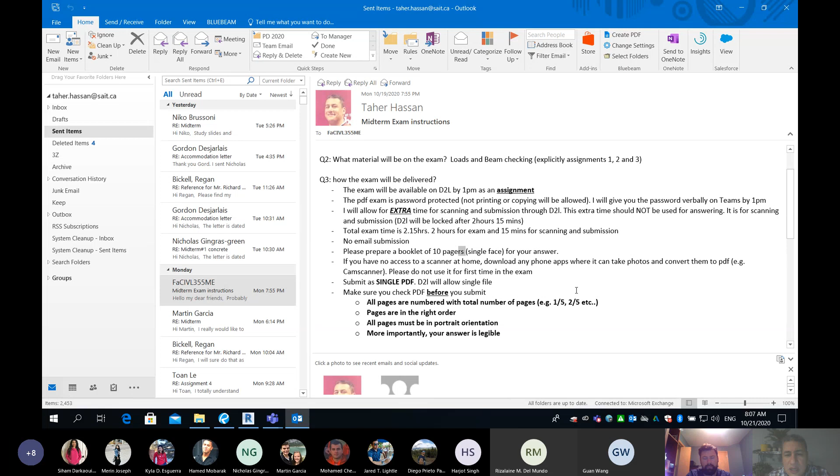Now, please prepare 10 pages — there's a typo here, it says pagers, it's only pages. So prepare 10 pages, single-faced, for your answer, like a booklet where you can answer the questions.

Also, if you have no scanner at home, which I guess not everyone has, all I'm asking is download any app — I'm not selling you an app, any app you like. However, please get comfortable using it. I guess CamScanner or a document scanner app is a good one. Whatever you like, use any scanner, but please do not use it for the first time during the exam — that would be a fatal mistake. Please ensure you understand how to scan it.

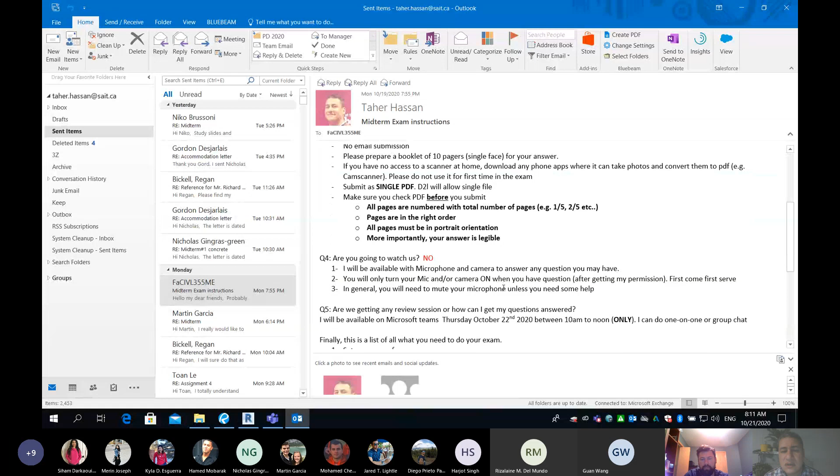I think that's intuitive, but the thing is, when I don't say it, people don't pay attention, and even when I do say it, there will be one or two who don't follow. But then you just have to blame yourselves, not blame me.

Are you going to watch us? The thing is, I'm not going to watch you guys individually. All of us - I need to see 34 students for the entire 2 hours logged into MS Teams. You just log in, turn off your camera and turn off your mic, mute yourself.

You will talk and speak only when you ask a question - you'll have to raise your hand, I'll allow you, and then you unmute yourself and speak. And if it's a common question, everybody will be listening. So I'm not going to watch you.

So you guys are hiding, huh? So don't make use of that.

I said I will be available with microphone and camera to answer questions. You will turn off your camera and mute yourself. You only undo that if you have a question after getting my permission, and first come, first served. Okay, and please mute yourself unless you need some help.

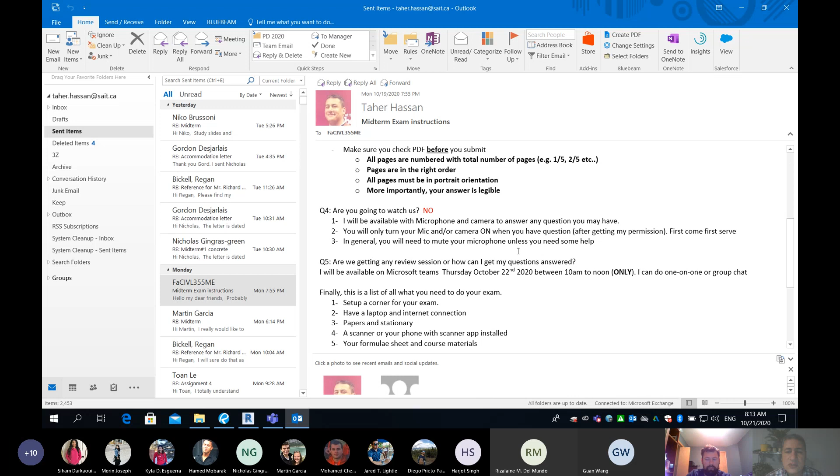Now, question number 5, which is very important, very important. I got this question probably 1 or 2 times. Are we getting a review session? So here is the point. I'm straightforward. If you are a fair person and you study my material and the exam, you will see the exam will be very, very fair. There is no surprise. Anything on the exam, probably you've seen it so many times, if not a single time in my class.

Okay? So I don't want to spend hours reviewing and solving a copy and paste of what I've done, because your lecture notes already have numerical examples. It's not theory. It is mixed between theory, introduction, and also numerical examples. So all I'm asking you is very simple. Maybe watching the video is very time consuming because we've done like, let's say 6 weeks or 5 weeks to the midterm exam. So watching 5 times 3 times 2, this is very time consuming and it's not feasible.

So what is feasible is simply reading the lecture notes. I guess the best way to go right now is printing your lecture notes, or maybe leave them not printed but take notes on them, just like Gord did. You always have some notes on your lecture notes. I think this is the best, and that's what we used to do when we went to class. When we were in the class, there were no videos, there was nothing. It was me writing on the board, and my students copying my board into their own lecture notes.

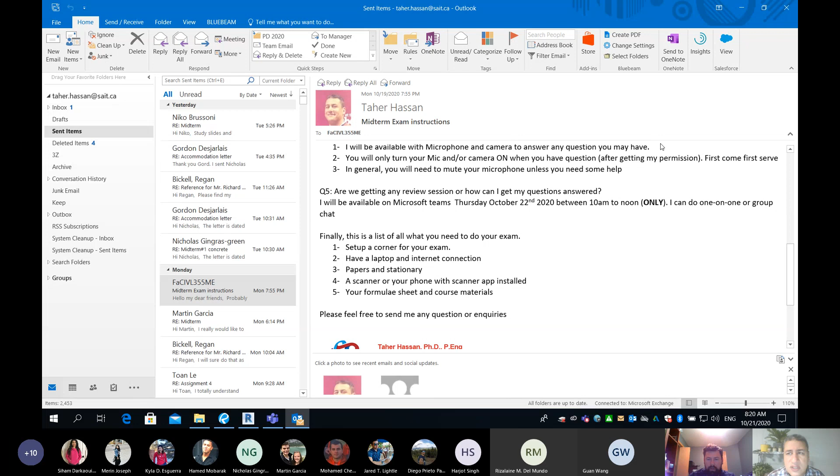Prepare those 10 pages like a booklet of plain paper or engineering paper. I don't care whether it's plain white or engineering. That's your choice. Make sure you have a scanner next to you or your phone with a scanner app installed, and you know how to use it properly. And finally, your formula sheet and course material, whether you like it printed or digital, that's your choice. I have no control over that. Okay, guys? Any questions so far?

Hopefully my email gives you a full picture of what the exam will look like in terms of administration, in terms of content, assignments 1, 2 and 3, there is no surprise. And I say one more thing, and it has to be clear. My exam needs somebody who is smart. When I say smart, I'm not saying genius smart. It means vigilant. When you look at the problem, please don't jump right away and solve it. Give yourself 1 minute, because this single minute can save you a ton of time.

For example, if I gave you a beam section, look at the rebar. Is my rebar symmetric or not symmetric? If it's symmetric, you know where the centroid is. If it's not symmetric, then I know what to do to find the centroid. There was a very common mistake, look at assignment number 3, look at my feedback and markup for you. Some of you used the centroid in the middle, while in the assignment it is not in the middle because it is not symmetric.

And remember, when I say it's not symmetric, I'm referring to the number of bars and bar diameter. To say my rebar is symmetric, they have to agree in number and also in bar diameter. So if you have a change in bar number or bar diameter or both, then it is not symmetric, and you have to find the centroid using what you learned in strength of materials and early on in my class. Please be observant. Think for 1 minute before you answer, because it will save you a whole bunch of time.

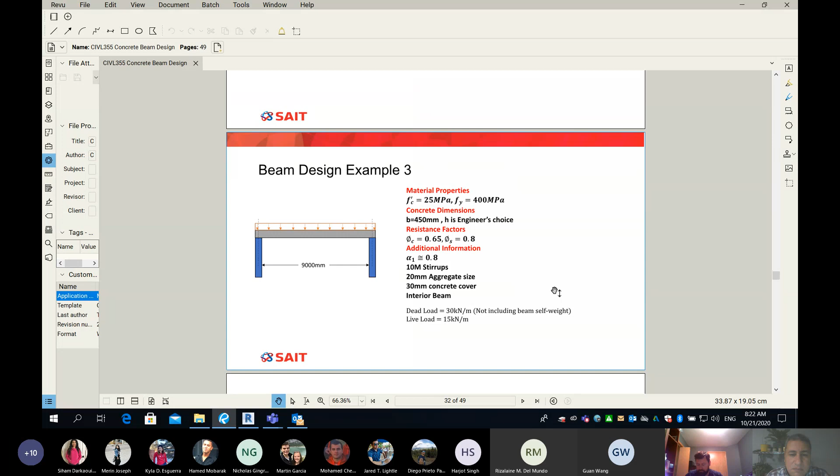Okay, great. So let's move on to our class today. So I have my presentation, which I started the last class, and the example, which was kind of a roller coaster, where we have to iterate and go back and verify this and verify this, so it doesn't work. No, let's change that. And that's a good example to prove that the design process in general is not a linear process. If they do not work, we have to refine them and do some kind of iteration, internal iteration.

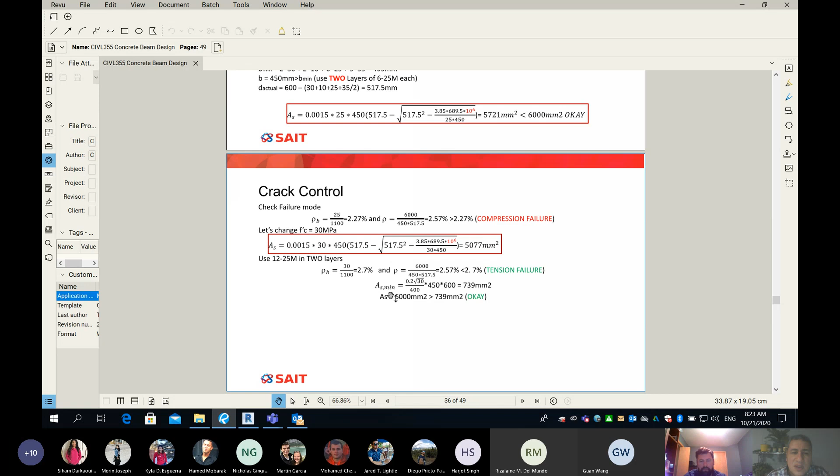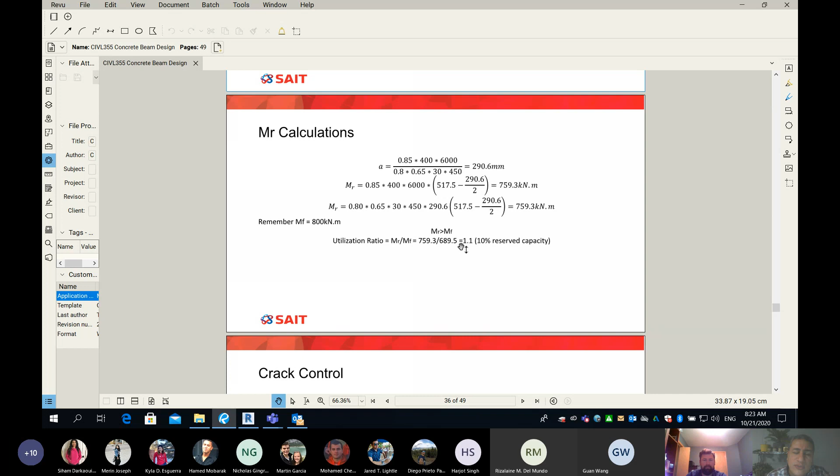Now, guys, where we ended up last class is somewhere here, okay? So this is where we ended. We talked about how to do the beam design and also how to do crack control. But the thing is, there is something I never covered, and that's why could you please download my latest set of presentation like this one right now, because there are a few pages added, and again you will understand why I added those.

Okay, now let me start here. You guys know this number here? What is this number? Can anybody tell me what is this number? I'll zoom in. Look at my screen. The moment force. Excuse me. The moment force. Actually, there's nothing called moment force. It is called factored moment. So this F over there is referring to the factored moment, because you can see we factored our loads. And so we're using here our factored load, and what we get is something called factored moment.

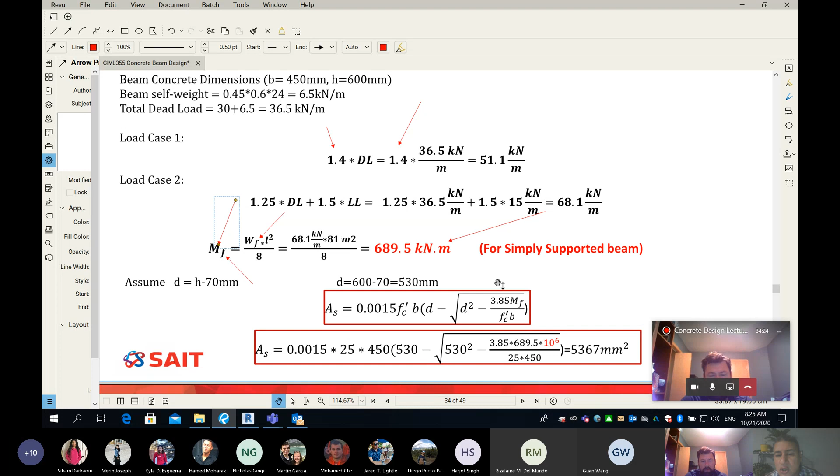Okay? So guys, in plain English, what do you mean by moment? It is the moment that is going to act on my beam under factored load. So what is my job in my design? I need to make sure that my beam is strong enough. When I say strong enough, it means the capacity of the beam will have to be equal or more than this number. That's something we said several times in my class so far. We have to make sure that M sub R, which is the moment of resistance or the capacity of the beam, exceeds or equals my MF. And I always start with MF is equal to MR, if you're following.

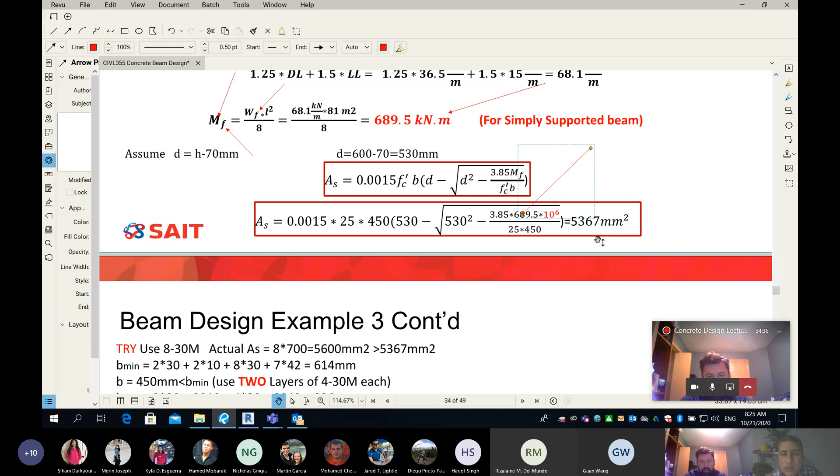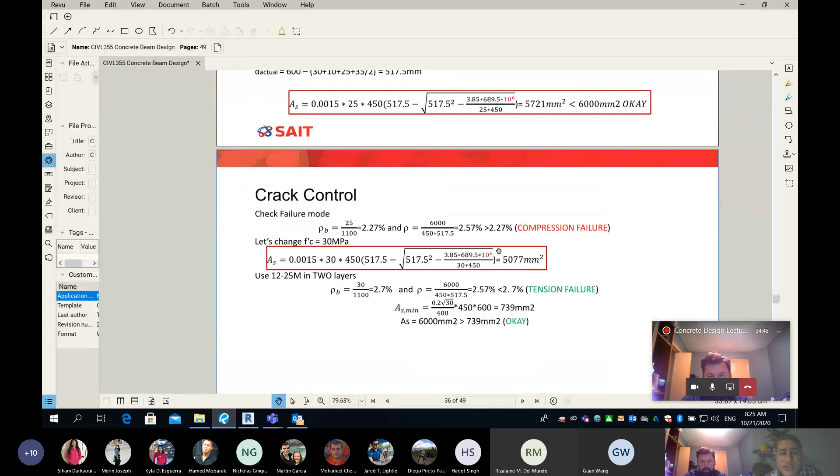And then when I say MF equal to MR, I can use the same number here to find the amount of steel. And that's what I did. The amount of steel was this much, which is 5,367. And then what happens? I went through iterations, not only one, probably there were a few iterations here until I'm able to make sure that my beam is working. At the very end, I used 12 25M, and so those are 6,000 square millimeters of rebar, and the required area of steel is simply 5,077.

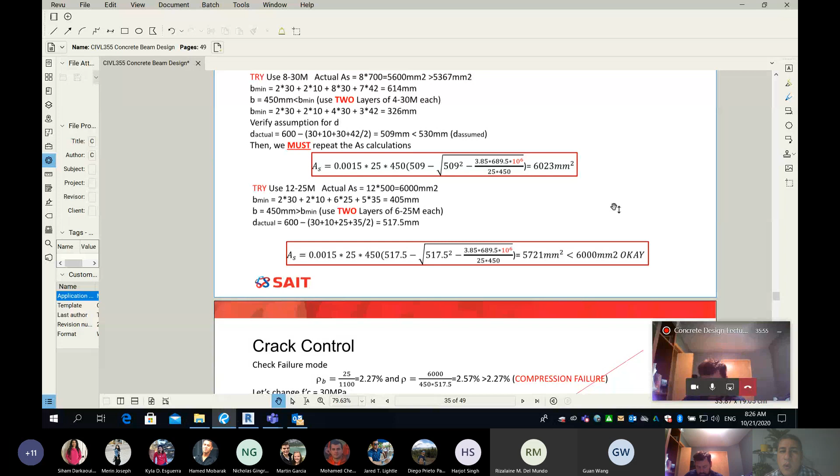So you can see so far we have two moments. One is called M sub F, which is the factored moment that will affect your beam. And the other bending moment is called M sub R, which is moment of resistance, which is the capacity of the beam. Now, guys, remember I said along the way, yes, we start from the equation MF equal to MR. So I will start with making the capacity of the beam the factored moment. However, I will ensure along the way that my moment of resistance or the capacity will never fall below MF. How? One of the things is we need to provide area of steel always more than this number. Always has to be more than this number.

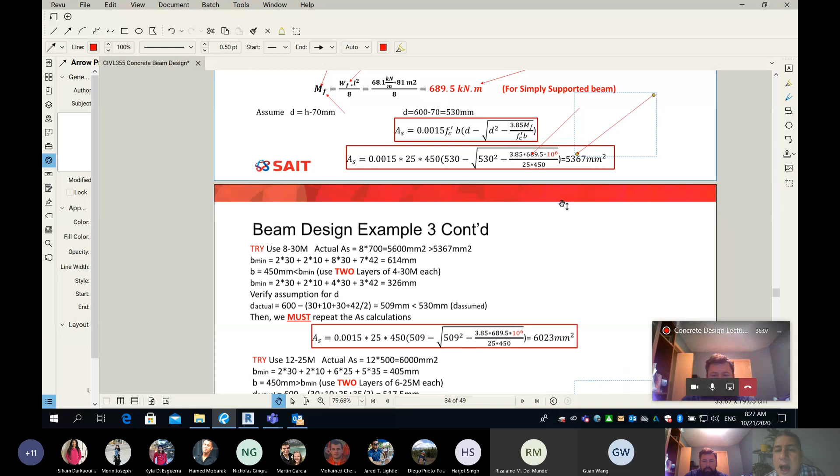Okay? The actual area of steel always has to be more than the area of steel as per the equation. Number two, for the lever arm, I have to make sure that my actual lever arm is more than the assumed lever arm. Those are the two things that will ensure that the moment capacity of your beam will exceed the factored moment, so we are on the safe side. Following so far? Are you following this discussion? I need to hear some noise.

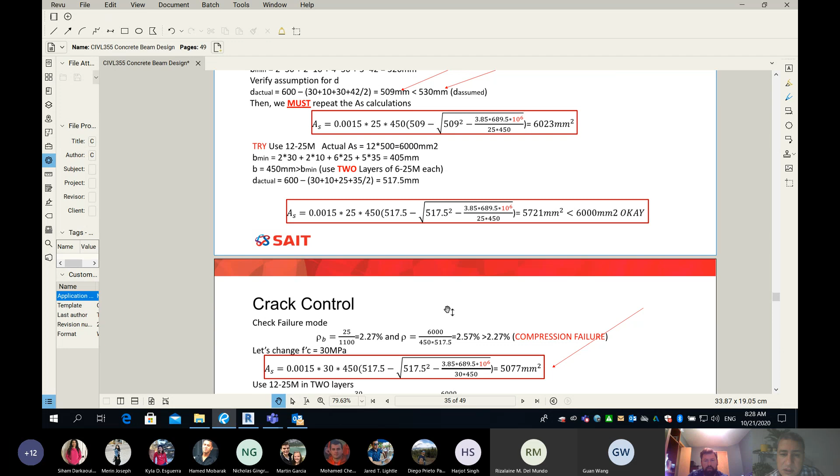Yeah, we're following. You said there were some new slides added. Exactly. So here we go. So you can see I added one slide here. And please, when you look at this slide, there is nothing new. There is nothing new. So we started from a beam that needs to have a resistance. Remember, I'm gonna remind you, what is the number? The number was 689.5. Okay, the beam is supposed to do that. However, as I added steel more than required, and made sure that my lever arm is more than required, what do you think about the MR? Is it going to be exactly this number, or will it be more?

More than MF, my MF. Exactly, guys. So the last slide here, which I added for every example that I have solved so far, and I will show you where. So for this example, I did exactly what you will do tomorrow in the exam. It's a check problem, because my beam is already designed, so I know how many bars, I know the beam section, the shape, the dimensions, everything is known. So I'm going to do beam checking to find what is MR, same as we have done in number 3, which will be examined tomorrow.

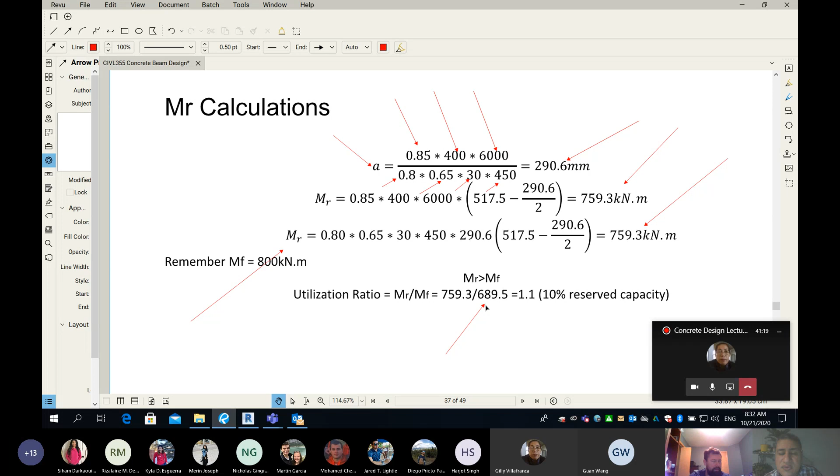Guys, look at this, please. So now my moment of resistance is 759.3. And remember, originally my moment, I'm sorry, I have a mistake here, I will have to change it. So my MF really is 689.5, which I estimated from here. So remember, I need a beam to resist 689.5, but when I finalize my design, my beam is going to resist this much. So the ratio between MR and MF is 759.3 divided by 689.5, which gives 1.1. Let me ask you, what happens if this number is equal to 0.9? What do you think?

That means your MF is higher than your MR. Yeah, what does this imply? What does it mean? Your system cannot resist the load. That means it's unstable. No, sir. No, no, no. You're confused. You said something very nice, and then you followed by something that is not right.

So it means yes, it means it's unsafe. Okay, but the words unstable and unsafe, those are two different names, they're not the same. So your beam is still stable, but it's unsafe. It means if you arrive at this level of load that gives you 689, your beam will fail.

And that's why this ratio is called utilization ratio. And simply, it is the ratio MR divided by MF, or actually, to be honest, this is not really a very common concrete terminology. You do that in steel. In steel, it's the reverse of this ratio, MF over MR. So I probably need to revise that. We don't call it utilization, because MF over MR, the inverse, is the utilization ratio. But everything here is still valid.

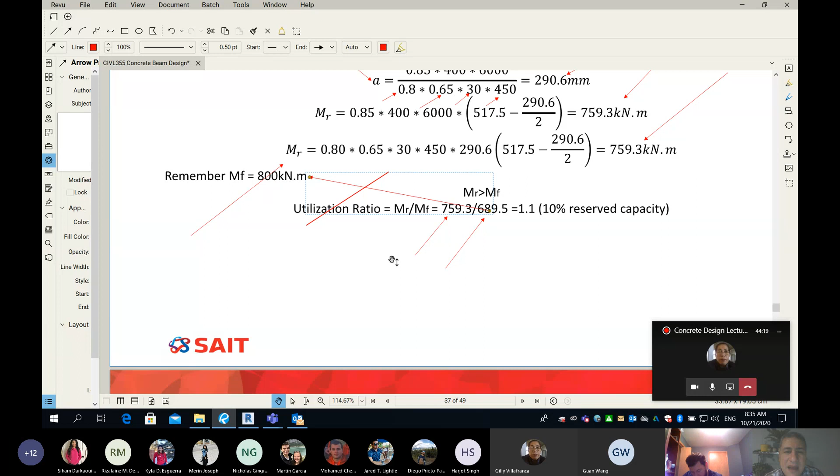Okay, so guys, you can see there is still a typo. This is going to get better and better. This is wrong; the 800 is supposed to match the 689. And this is not called the utilization ratio. The inverse is called utilization ratio. I'll think about this name and come back with a good name. But again, for every problem we've done so far, three problems, you will see I have added one page here.

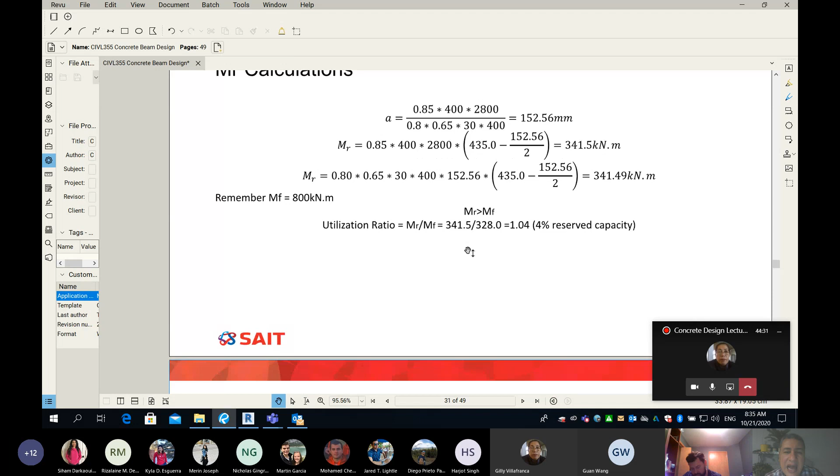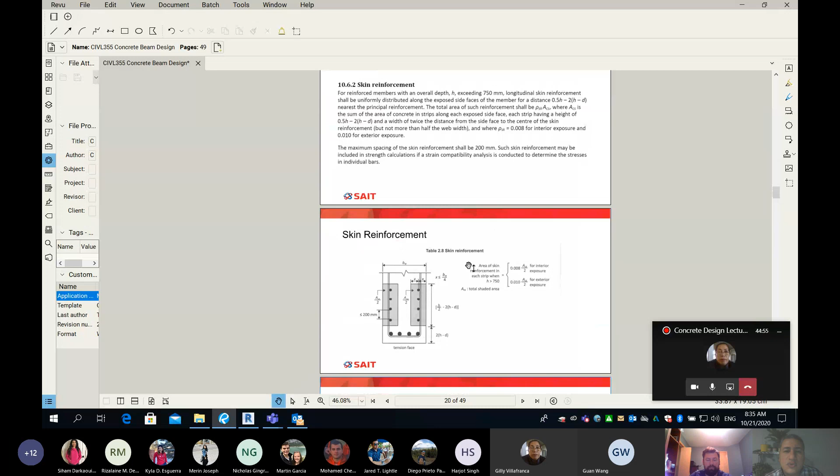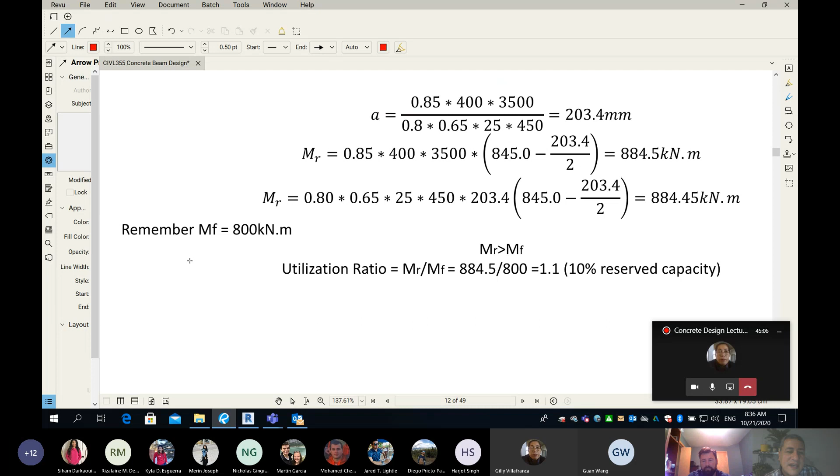So this is how to find the ratio, and look at this, another typo here. That's not 800. Simply, I found my MR, I stated MF, and we have here only 4% reserved capacity. For question number 1, somewhere here I added one page to find how much reserved capacity we have. And that's the only time your 800 is correct. I just copied and edited. Anyway, you get the idea.

The idea is we start from MR equal to MF, and along the way, I make sure that MR will never, ever fall below MF. Otherwise, it's unsafe design. So I go back quickly and I'm able to find the MR. The MR over MF should be more than 1.

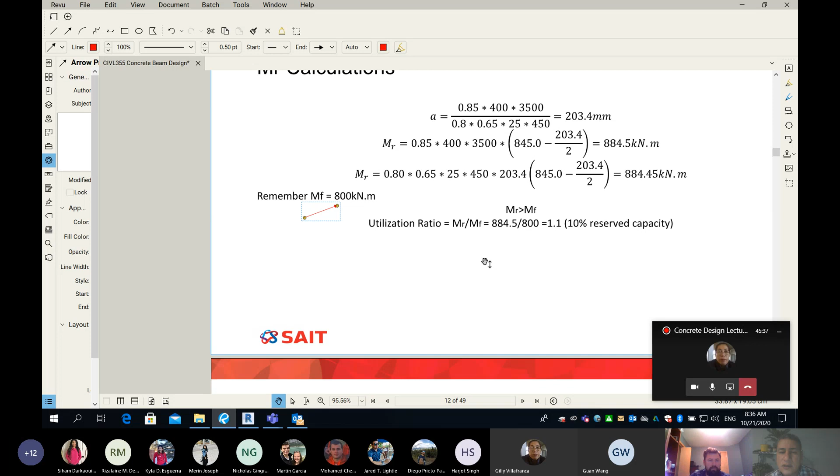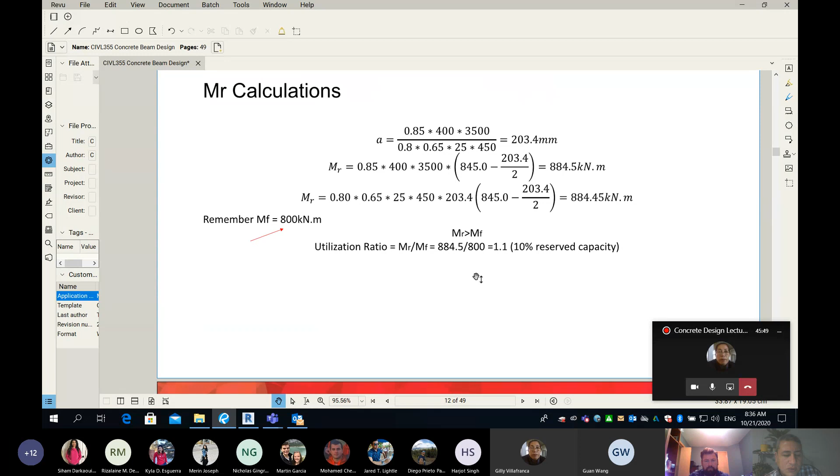So guys, let me ask you a few things here. What if MR over MF happens to be 2? Is that good design? Is it safe or unsafe first? Is it safe or unsafe if you divide your MR by MF and you find it's 2? Unsafe? If you have a 2, again, please forget about this word, because utilization ratio is not correct.

MR over MF is 2. It means MR is twice MF. My beam capacity is 2 times the applied moment, so we have 100% reserved capacity. It means my beam is safe. But although it is safe, is it a good design or bad design? Overly designed. That's overkill. We added much more rebar, or maybe much more concrete, than we should, because we have capacity twice the MF.

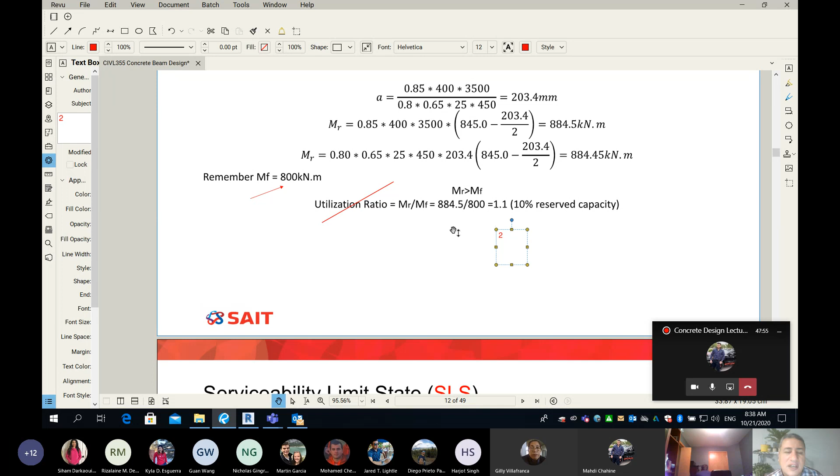That's very common in steel design. After you design, you find something called utilization ratio, which tells you how close you are to 1. Best design for utilization ratio, if you are very close to 1, it means you're using the best of your material. Okay, are you guys following so far?

We have Gord. Gord, you have your hands up. Sorry, accidentally hit the button when I moved to go put the printer paper in.

No worries, sir. Okay, so guys, now we can see here the few pages I added, so you're aware of why and where. Now I'm going to show you something very, very interesting.

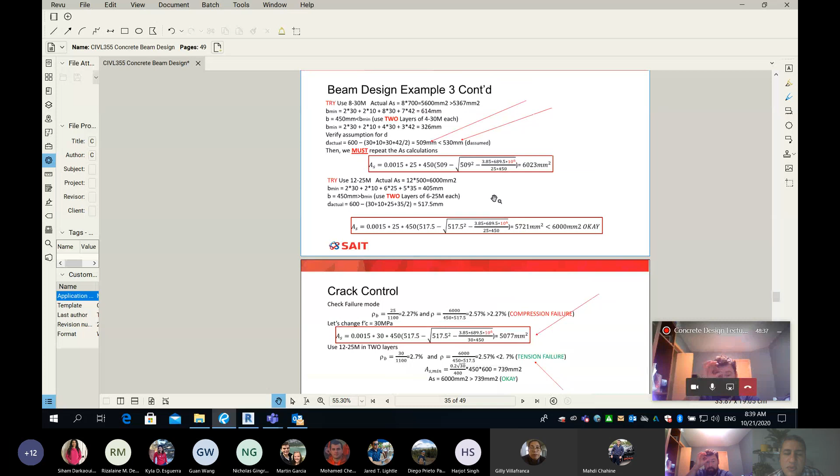I'm hoping. So we've done this example here, and every time we need to find the area of steel, we go this way. So I derived this equation for you guys. If you remember, we derived this equation in our class. So every time I want to find area of steel, I use this equation.

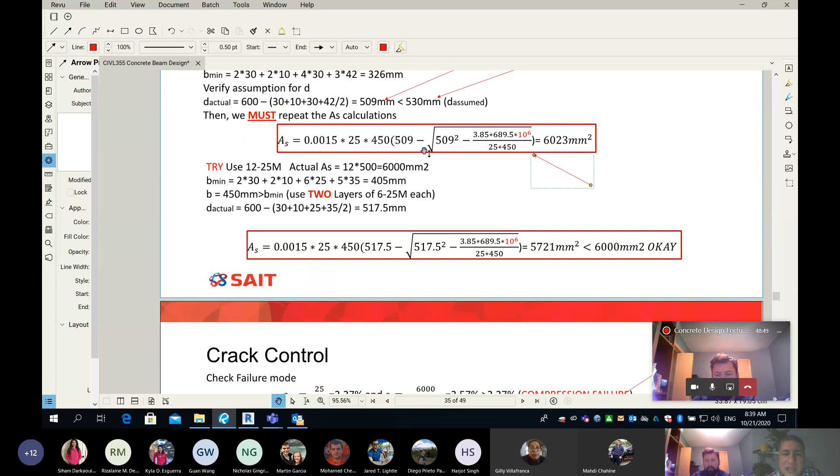Is that the only way I can do that? Not really. There is another way which will be discussed now. So guys, look at this, please. This is the new method that I'm going to show you.

In the beginning, I know 100% this will be kind of difficult to understand, but this will be our way to go in this class. This is an alternative to the equation. Instead of using this lengthy equation like 0.0015 F prime C and so on, we have another method. Where did this method come from?

Nothing new. It came from the same equation that we did, but instead of solving for the area of steel, we solve for rho, which is the reinforcement ratio. Now let me show you how this method works. This method requires minimum math, unlike the 0.0015 FC dash B minimum math, and I will show you how, and why it's a favorable method.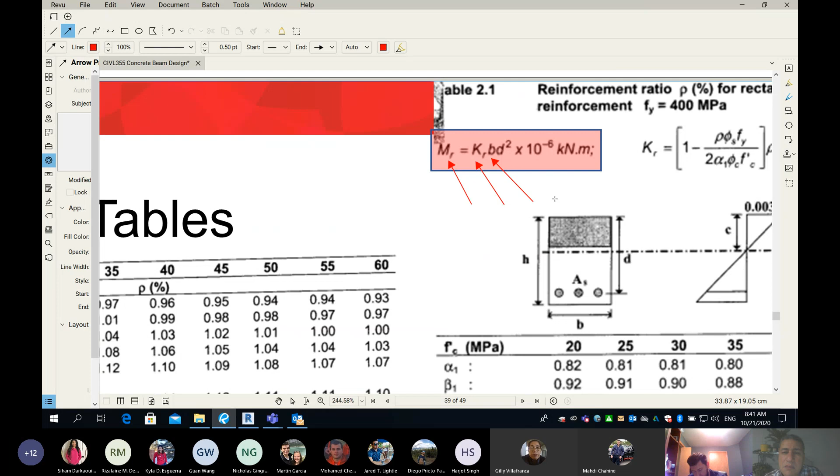Probably need to zoom in. So this is my KR. And what is KR? It's simply this: the moment of resistance of your beam is equal to KR multiplied by B, the width of the beam, multiplied by D squared, which is the effective depth squared of your beam.

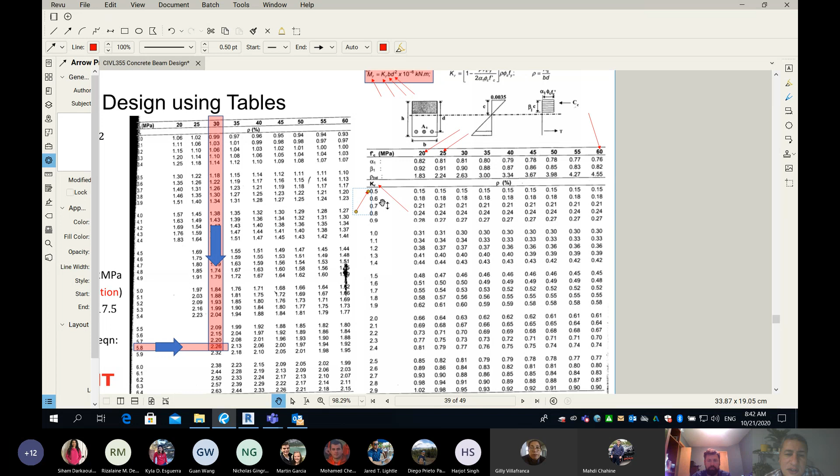Next, there are so many columns, and every column of the table corresponds to an FC dash value. So the first column is 20. This entire column is for FC dash of 20 MPa, and 25 all the way to 60 MPa. How about the rows? You can see my first value for K is 0.5, and then the table is built on intervals of 0.1: 0.5, 0.6, 0.7, 0.8, 0.9.

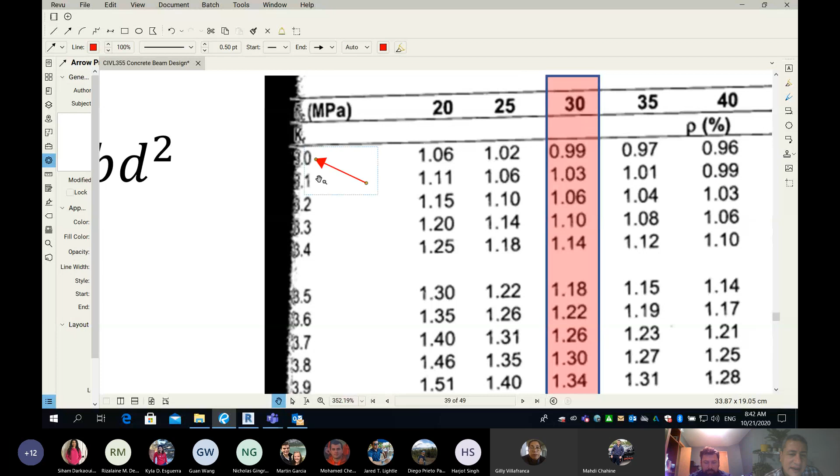And the table is not only one page. On the right here, that's page number 1, which ends at 2.9. So the last value on that page is 2.9. Then page number 2 starts from 3. I'm going to zoom in here, not very clear, but this is 3, and it keeps going all the way to the end of page number 2, to 6.4.

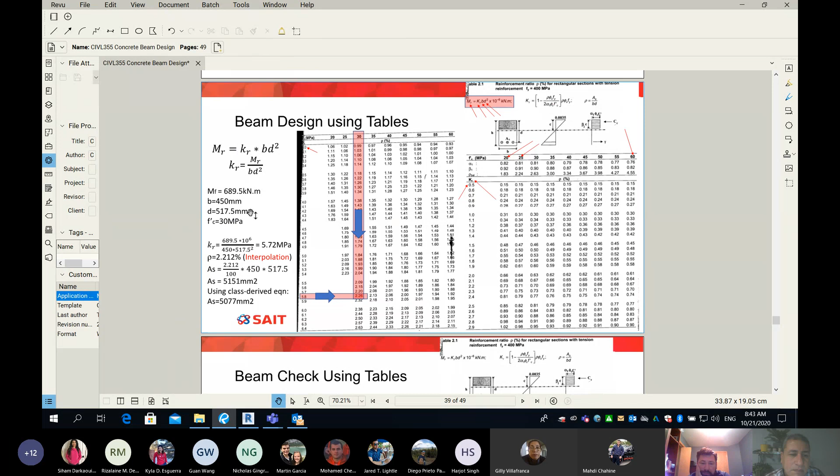Now, how do we use the table to design my beam? To be honest, I wanted to show you how easy it is to do that. So what I'll do is use exactly the same problem we've done before. I'll go up, and remember, look at this please.

Look at this please. You can see here how much is my moment? It's 689.5, that's MF. Now, what we did is we simply found our D based on the assumption of 70 millimeters.

Once you find your D, use the equation to find the area of steel. Now, what I'm going to teach you is we're not going to do that. I'm going to show you how to use the table to simply find the same amount of steel, but in an easier way. Watch this, please.

I'll zoom into the left side. So here is my same information. Here is my moment, which is 689.5. Here is my width of my beam. Here is my depth of my beam, effective depth. And here is my FC dash.

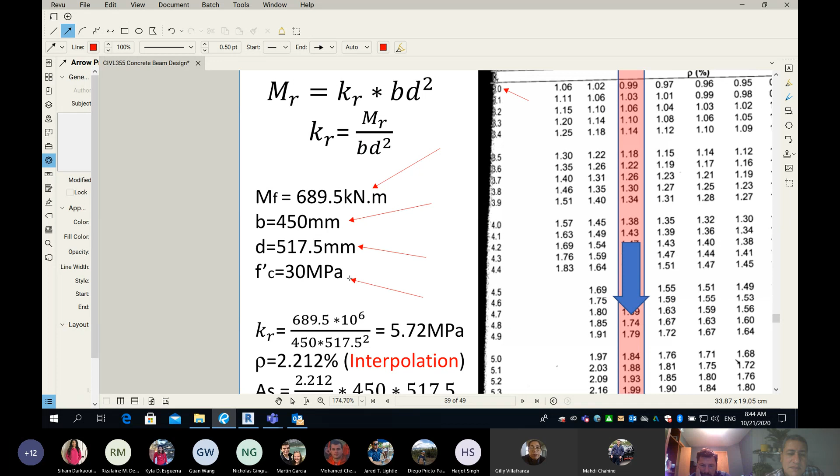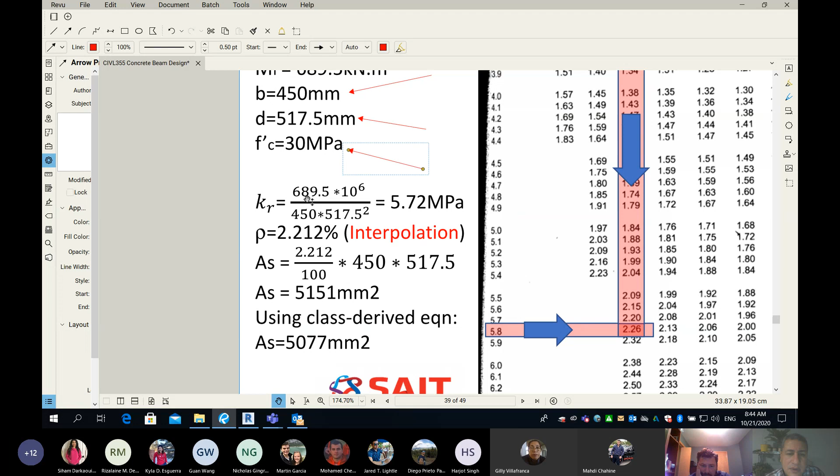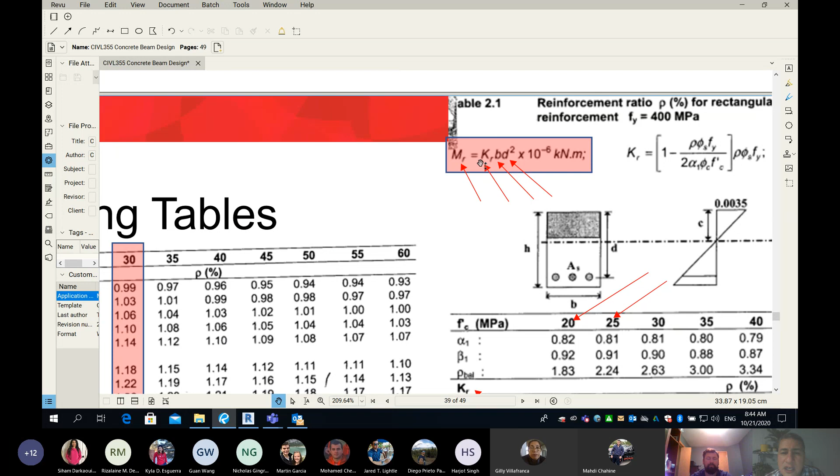Here are the steps to find area of steel, very simple, and it involves way less math than the equation. All you have to do is say my moment M divided by B times D squared. There is nothing new, it comes from the equation here. If my moment equals K times B times D squared, how much is my K? You rearrange the order of the formula, so K will be M divided by B divided by D squared.

Watch this, we'll do it here. So moment, the M, divided by the width of the beam, that's B, and D squared. The only tricky part is, since everything is in Newton and millimeter, you have to multiply the moment by 10 to the power 6 for the units. And what you'll get is 5.72, which is in MPa units.

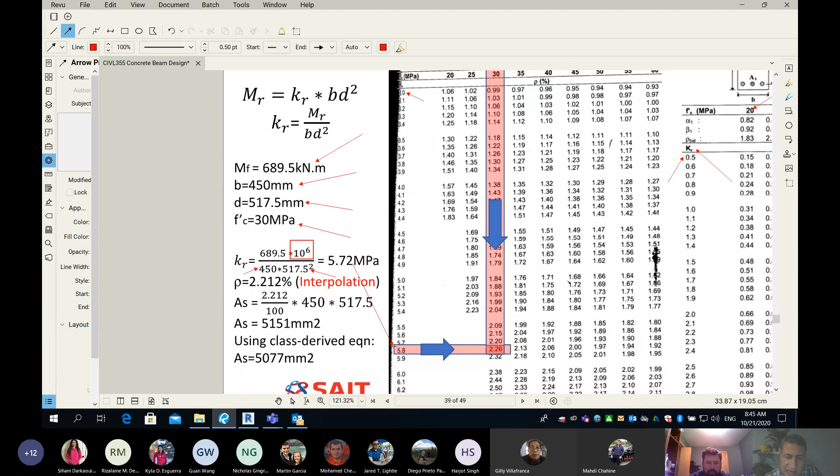Then you take the K into the table. Look at this, please watch me. I'll go from 5.7 here, and say, the 5.72 is somewhere between 5.7 and 5.8. Since the table is simply provided on a 0.1 interval for the K, what I can do is linear interpolation.

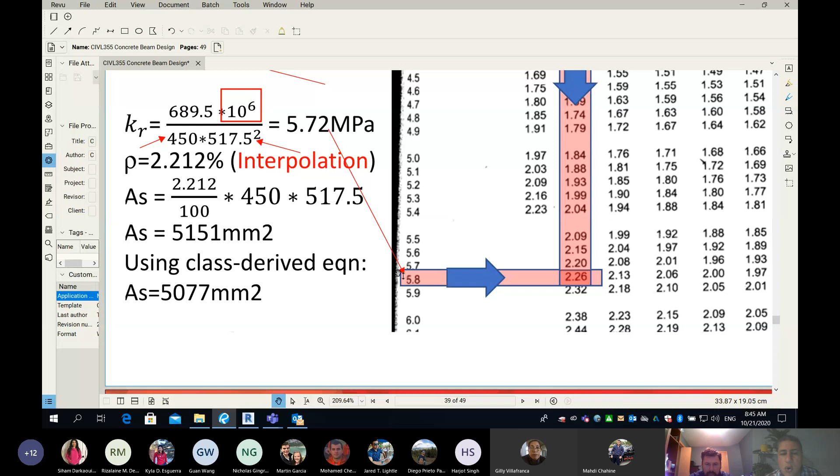So what you do is go horizontal. Once you go horizontal, the column you're going to hit is the column for the FC dash. Watch this, on the top here my FC dash equals 30. Look at my arrow, the blue ones. I go on the column of 30, and I go on the row for the K that I got from this equation.

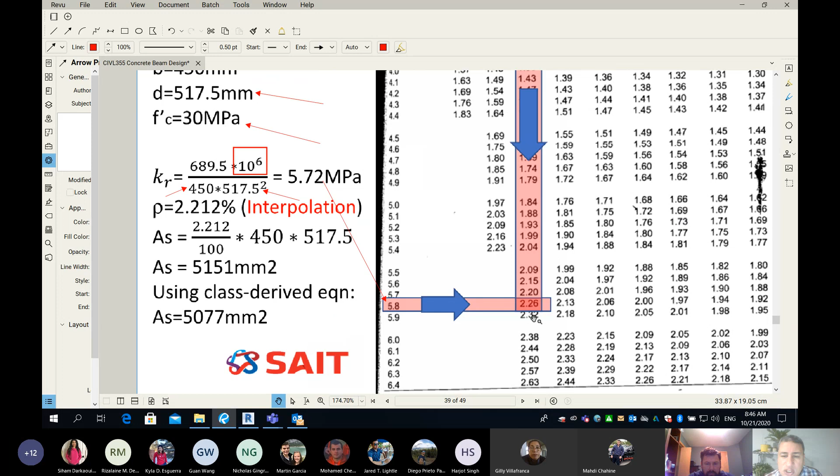So simply, your K is equal to how much? Not very difficult, you interpolate between 5.7 and 5.8. You simply interpolate between 2.2 and 2.26. So my number will be in between those two numbers. I did the interpolation, and guess what, I got 2.212. So guys, what's this number? What exactly is this number?

It is the reinforcement ratio. So the table will give you the reinforcement ratio of your beam. If you're lucky, your K will be 5.7 or 5.8. If it's 5.8, great, you get 2.26. If it's 5.7, you get 2.2. If it's in between, you do linear interpolation and find a number in between 2.2 and 2.26. So my number is 2.212.

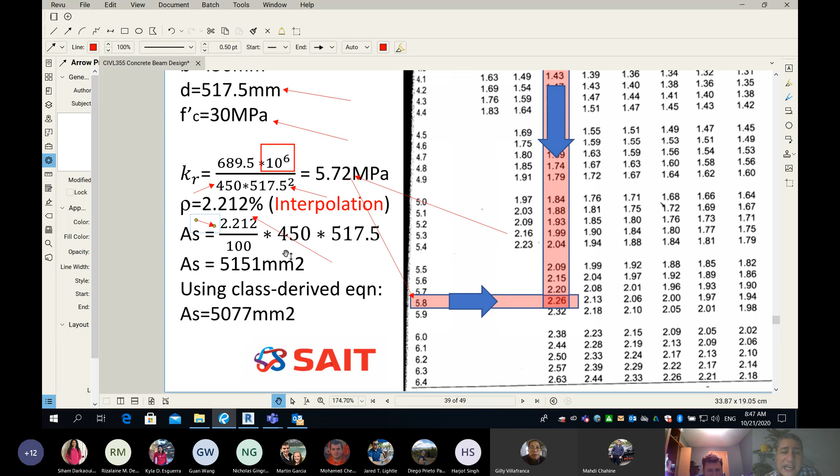And then finally, if you want to find area of steel, very simple. You take the reinforcement ratio, because by definition, the reinforcement ratio is the ratio between area of steel divided by B times D. So if you know the reinforcement ratio, you multiply times B times D, and you will get the area of steel. And remember, the area of steel is 5151.

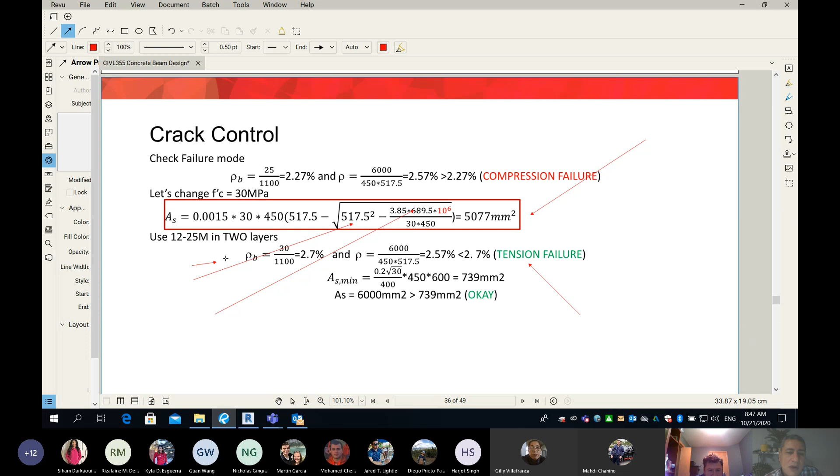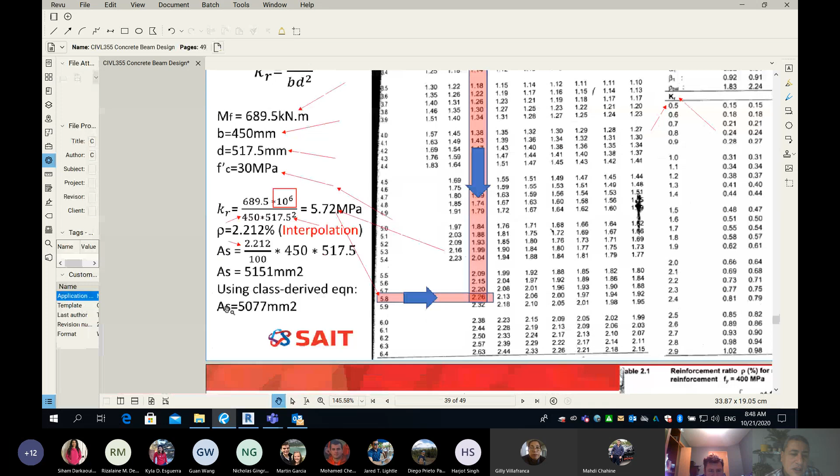When I did that using my formula, watch this. When I use my moment here, and here is my width, my depth of the beam, 517.5, and here is my B, I got 5077. However, from the table, we got a little bit different number, 5151. So you can see, that's from the table, and this is from the class derived equation. Now, why is there a little bit of difference?

Let me check first, are you guys following? Are you following? Yeah, we're following. I know in the beginning it looks difficult, but I will tell you this will be our favorite way to find area of steel, because the formula is very lengthy and requires lots of math. Anyway, I'll give you one or two rounds and you will see it will look even better.

For using the tables, why do we use linear interpolation instead of just going to the next higher number like we do in steel, to be on the safe side? Good question, I'll answer this one shortly.

Yeah, then which one do you prefer, the one in the class calculation or this table? Which one is more accurate? I'll answer both of them. I'll answer Gilty, I'll answer Nicholas. Very good questions, thank you so much.

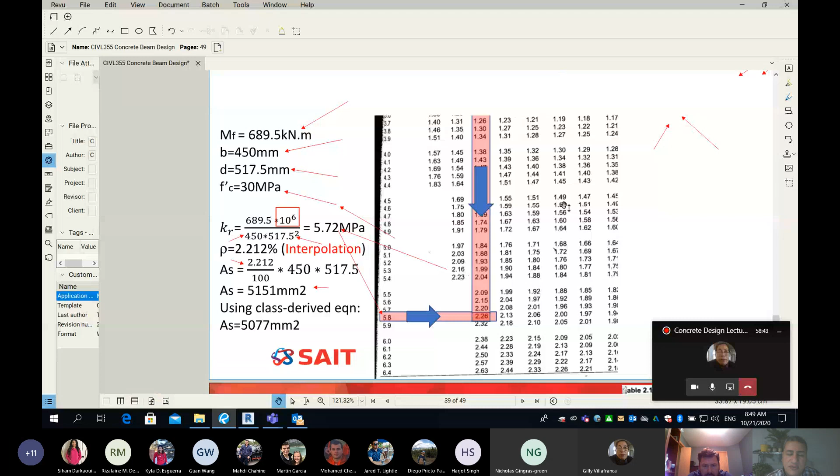So I'm gonna start here, probably with Gilty, and then I'll go for Nicholas because there is an order for the information in my head. So Gilty is asking which one is more accurate. Okay, so the answer is, do you guys remember when I derived this equation in class? Why I came up with this 0.0015? Does anybody remember how I got 0.0015?

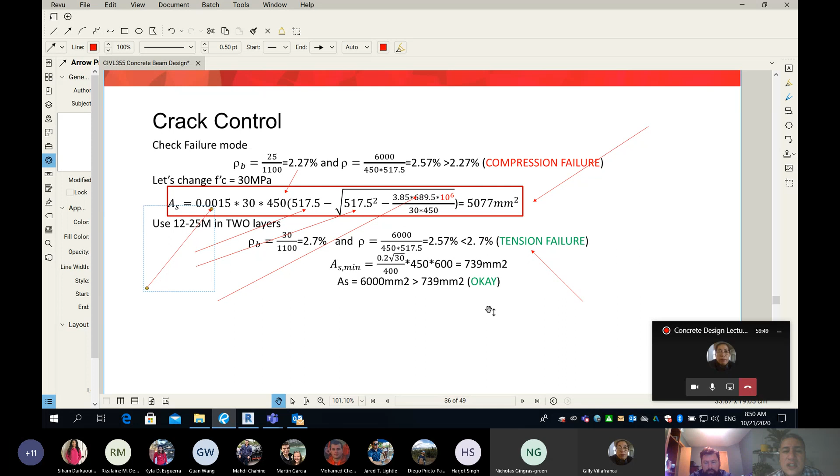Maybe you cannot remember, which is okay by me, by the way. You guys remember when I did the derivation, there was something called alpha 1, and something called phi c, and something called beta 1. Alpha 1 and beta 1 are the transformation from parabolic shape into equivalent rectangular block. And I said in the code, we need to estimate alpha 1 and beta 1. And what happened is, there are some equations in the code to find alpha 1 and beta 1. However, I said in my class, since all the time the FC dash will be between 20 and 30, the 0.8 and 0.9 is a good approximation. I need some noise - do you guys remember that, or nobody remembers that?

Yeah, I remember that. Okay, excellent. So guys, what happens here?

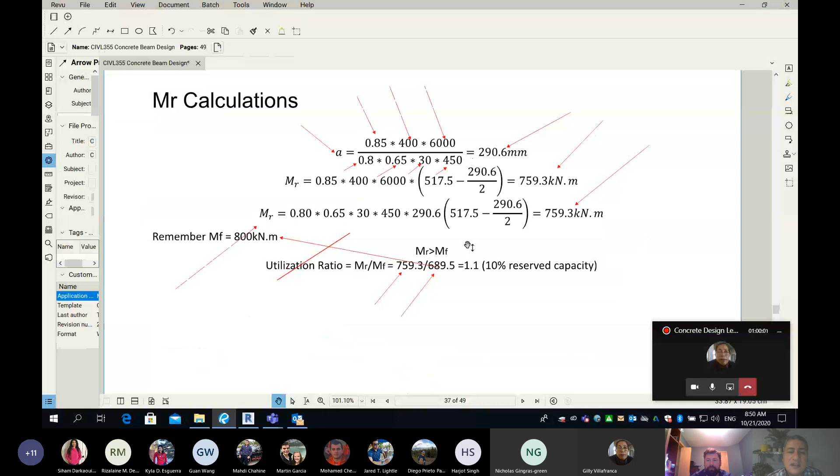So now let me ask you one more time, Gilly. Which one do you think is more accurate, the formula or the table? The table. Okay, is everybody got what Gilly just said? The table is more accurate because it uses the exact value for alpha 1 and beta 1, not as we assumed in my class. But by the way, this doesn't make the formula bad.

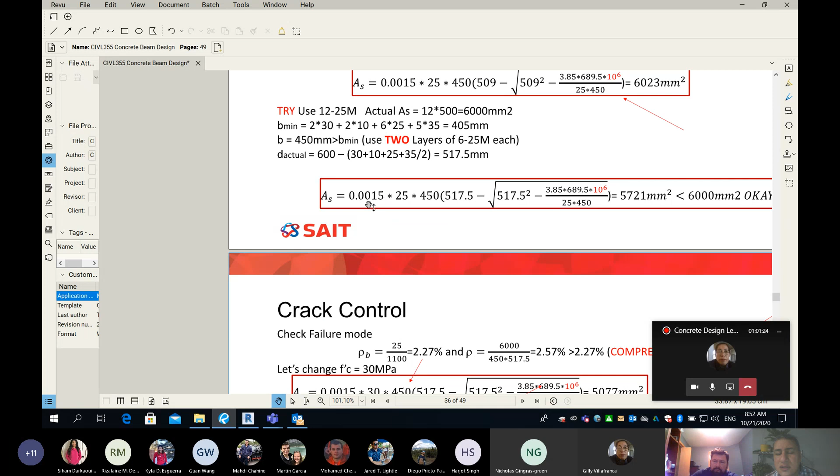All we have to do is, if you are interested, you can use the same formula, but don't use it in the simplified form. If you want the exact number, you need to go to the original form before we replace alpha 1 by 0.8 and beta 1 by 0.9, and you will get exactly the same result because they came from the same mathematical base. So that's number one. Did I answer the question, Gilly?

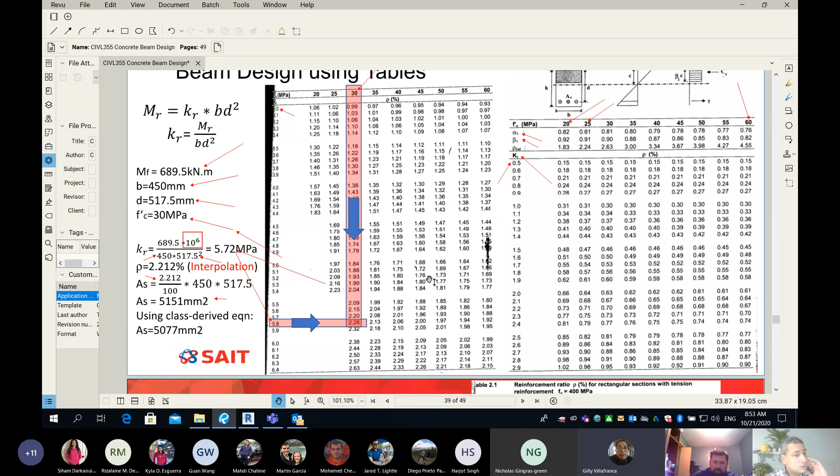Yeah, but I'm confused now in the beginning, because when we calculate something else using alpha and beta before going to AS, or maybe in some other situation, but in the beginning, especially when we calculate the CR or TR, are we gonna use also, or only in finding the area of steel, are we going to use this table, or in some other case like CR, TR, do we also have to use a table, or assume 0.9, 0.8?

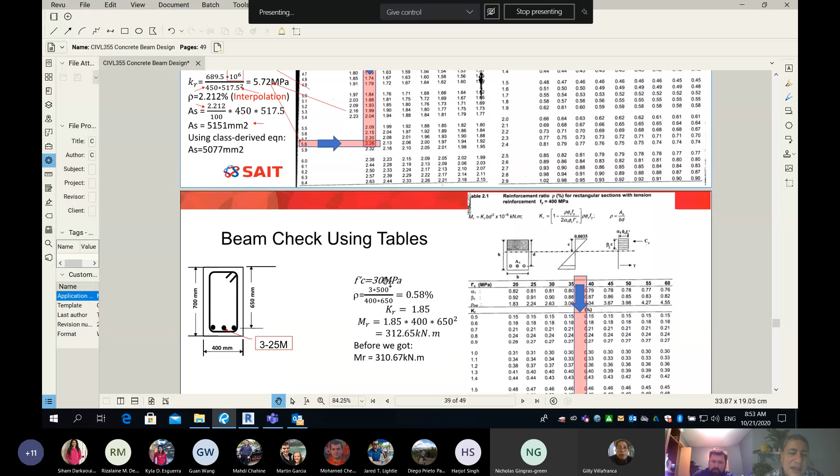So you are kind of confused because we're talking about design and you are referring to the check. So we do the CR and TR when we do the check, right? So you can use the table, and I will show you this in a minute, that we can use the table for checking too. But in general, really the formula or the table come from the same origin.

So they're supposed to give you the same results. However, I need to use the exact value of alpha 1 and beta 1, not approximation. And I can tell you the difference is insignificant. So please don't ask this question to me. Both of them give almost the same results. Please don't think this is significant. This is how much difference, 50 or 80 square millimeters of rebar, and that's very, very little. Very, very little, okay? Hopefully this answers the question for you, Gilly.

Now let's go to Nicholas. So Nicholas said, you know what? Maybe in other courses, we don't have to do linear interpolation, and we can just go from 5.7 to 5.8, and we pick 2.26, and this will be our reinforcement ratio, and then we use it in this equation to find area of steel.

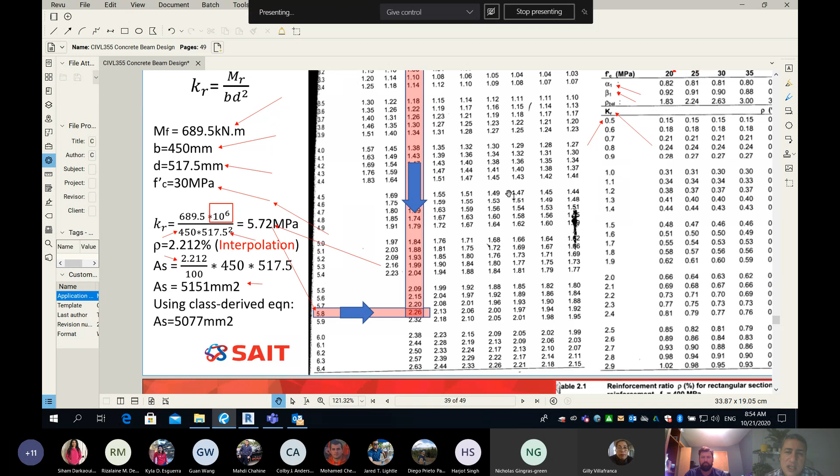You know what? Here is the answer. The correct answer is do linear interpolation. However, if you also use 5.8, this is also correct, but you're just trying to avoid the interpolation, so you save some time, but you waste some material. Okay. Hello, Nicholas. Did I answer your question? So specifically, yes, you can forget about the linear interpolation and just round your K up, and it means you get a little bit more area of steel than you should. Okay, Gord.

So for the area of steel, like on the exam, if we use the formula or the table, we should still be okay to use either one? I will force you, sir. I will force you, because again, that's exam. In real life, your question is a very legitimate question. In real life, both of them are acceptable to me as an engineer. However, in the exam, because I want to examine you and get one number, I will say use the class derived equation or use the table. So I will be very specific to remove any confusion and get one model answer. Otherwise I will get so many answers, and this will make my life difficult.

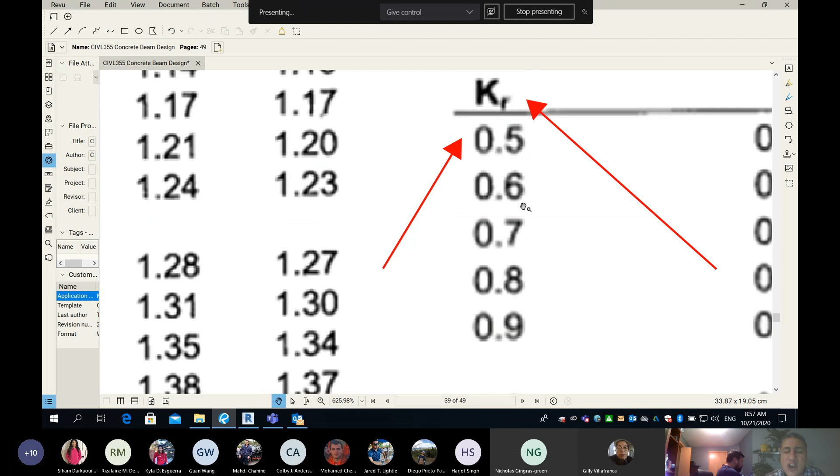Okay. Gilly. Yeah, I also wanted to add that if you bring up the value for Kr from 5.7 to 5.8, you may end up over designing. Is it? Not much. And you know what? I created for myself, with my own effort, an equivalent table like this one, and I can share it with you guys. I call it Tahir table. In Tahir table, the resolution of my K is even better. It goes from 0.55 to 0.6 to 0.65, so it has a finer interval.

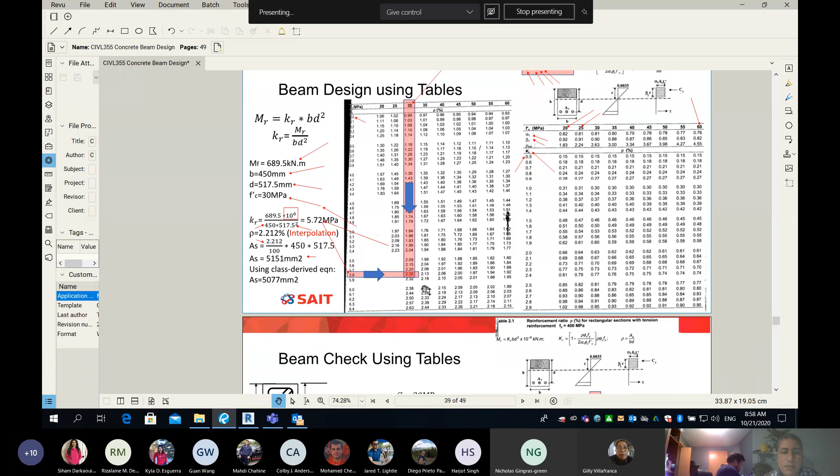Again, guys, please don't get distracted by those kinds of discussions. If you have time, do linear interpolation and try to become a good designer. If you have no time in the exam, you can round your K to the larger K. If it's between 5.7 and 5.8 and you use 5.8, look at this. When I did linear interpolation, I got 2.212. When I saved my time and used the larger K, I got 2.26. And if I multiply 2.26% by B times D, I will get a little bit more than

5,151. So a little bit of waste, but remember, you always have to pick among standard bars. Remember, I added 6,000, because I'm using 25M, I ended up with 25M, which means even those little changes don't affect your results. Are you guys following?

Yes, okay. So still the same thing, because no matter what, you're still gonna get 6,000 anyway for your total area. Exactly. Okay, so even those things, we know what's true. What's correct is linear interpolation. That's correct. Nobody can say linear interpolation is wrong. However, if you have no time and you know that if you do not do linear interpolation and you go with the larger K, then you'll end up with a little bit more area of steel.

Okay? And again, remember, at the end of the day, you pick among standard bars, which means probably you will add anyway to whatever you get from the formula or from the table. Okay. Any questions so far, guys? Any questions so far?

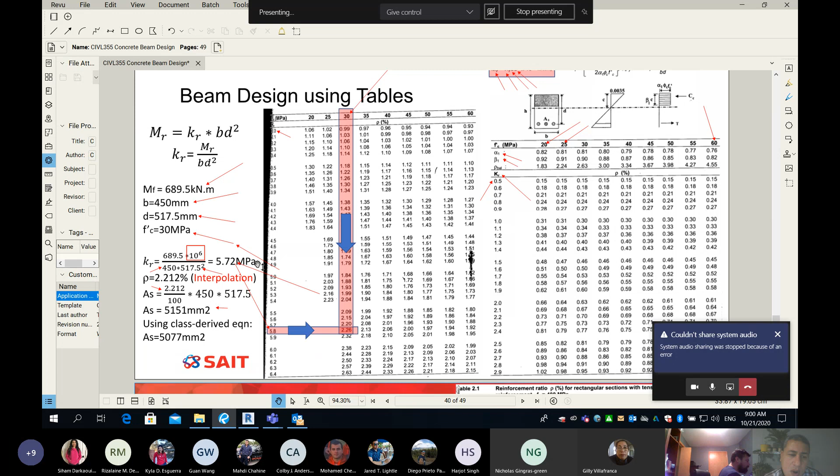In the table, you go vertically on the column of K until you find the K. And then you turn right, and then you hit the column where the FC dash is of your beam. And then you find the reinforcement ratio rho. Then you take the rho, multiply by B times D, you find area of steel. That's called design, not checking.

Now, in the next slide, which shouldn't take long, I'm gonna show you how to do a check for your beam. And what does it mean, check? It means, here's my beam. So guys, hopefully by now, everybody in class knows the meaning of check. It means my beam is given to me. Look at this, please. This problem is not new. We have solved it in our lecture notes. If you go back to where I covered the beam checking, I have exactly the same problem here.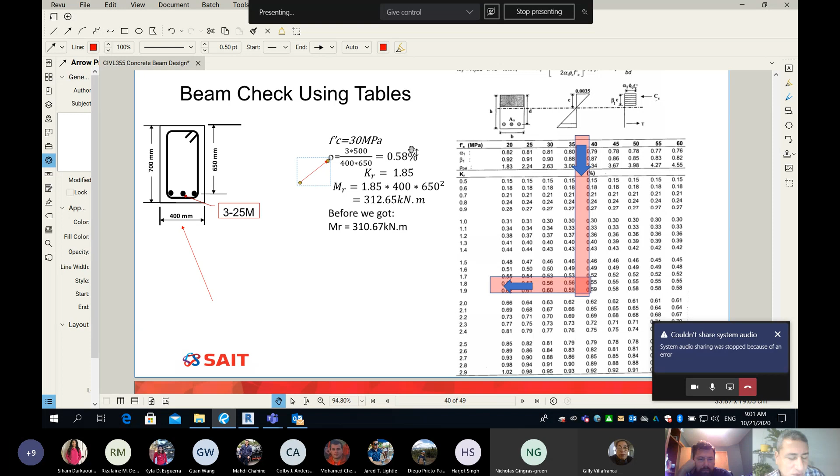Now, please look at the procedure. So if the beam is already there with dimension and rebar, then guess what? I can find my rho, my reinforcement ratio. How? Very simple. Look at the beam. We have 3-25M. So the area of steel is 3 times 500. And you divide by B times D, because that's rho by definition: area of steel divided by area of concrete. Guess what? I got 0.58%. So that's my reinforcement ratio.

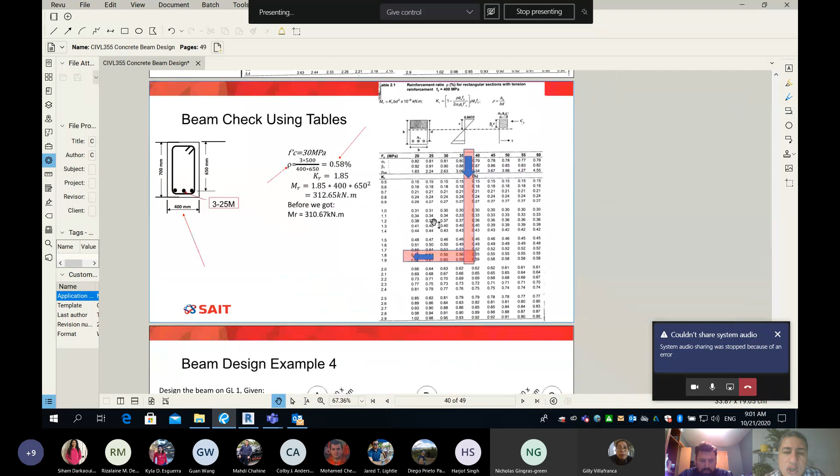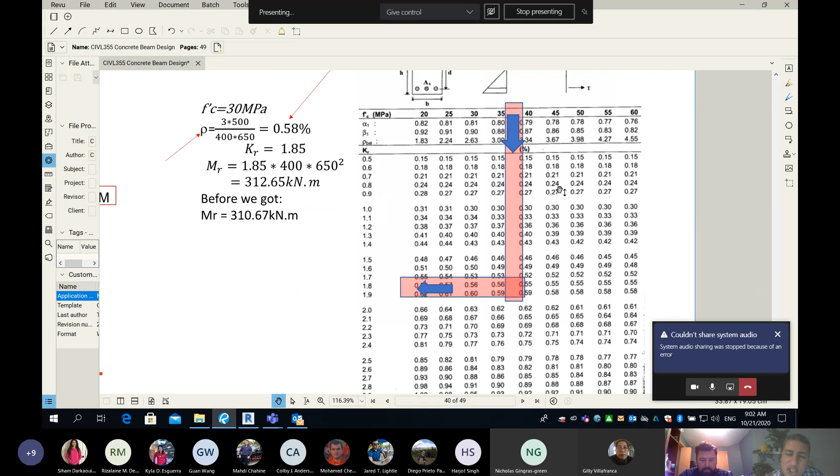And look at this, please. So the way I use the table, look at the direction of the arrow here, and look at the direction of the arrow over there. I'm sorry, guys. Looks like something was moved around, and I need to change that. My shaded area is not right. Remember, my arrow is supposed to be here. Please forgive me for that, okay? So my arrow is here.

So you go along the FC dash of 30. You keep looking at the numbers. We start here from 0.15. And then I go all the way down until I find my 0.58, which is here. So you can see here, 0.58 is between 0.56 and 0.6. Okay? So you go horizontal, which means my K is in the middle between 1.8 and 1.9. Do you guys see that?

I need some noise, please. Yeah, we can see.

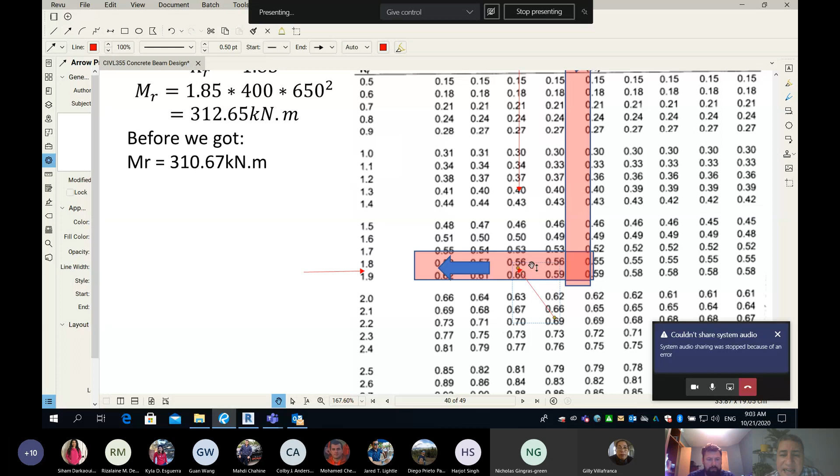My reinforcement in my beam is 0.58. So again, this shaded area is wrong. It's supposed to go around FC dash 30. So I went along the column 30 and all the way down until I figured out, here is my reinforcement ratio 0.58, which is exactly in the middle between 0.56 and 0.6, which means my K will be exactly in the middle between 1.8 and 1.9.

So which means 1.85. And then finally, you use the moment is equal to K multiplied by B multiplied by D squared. So you get the moment here of 312. And guess what?

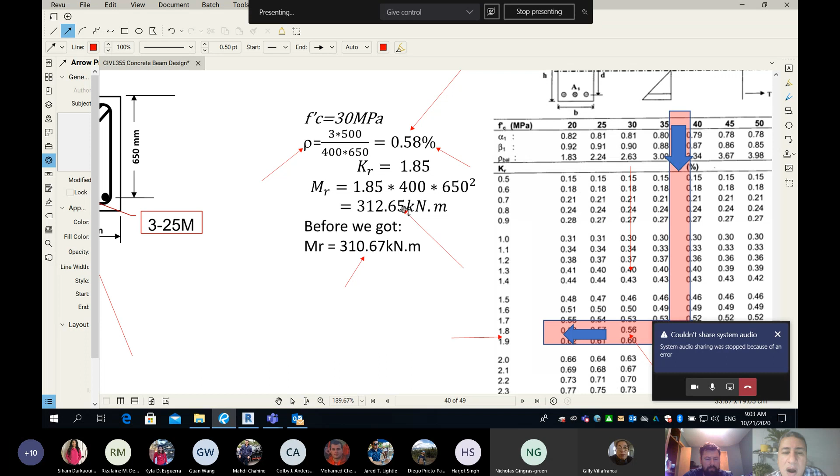When we did this manually to find how much is my CR, how much is my TR, how much is my A, then I got 310.67. Please go to your lecture notes and you'll see this number. Not this slide, the other slides. And you can see the two numbers are very close. Which one is more accurate? This one is more accurate. Why? Because we use the exact value for alpha 1 and beta 1.

Now I need to ask Nicholas. Nicholas, are you still there? Yeah. Okay, so I have a question for you. Oh boy. Oh, that's okay. Don't be scared. I'm not gonna bite you. Just use your brain.

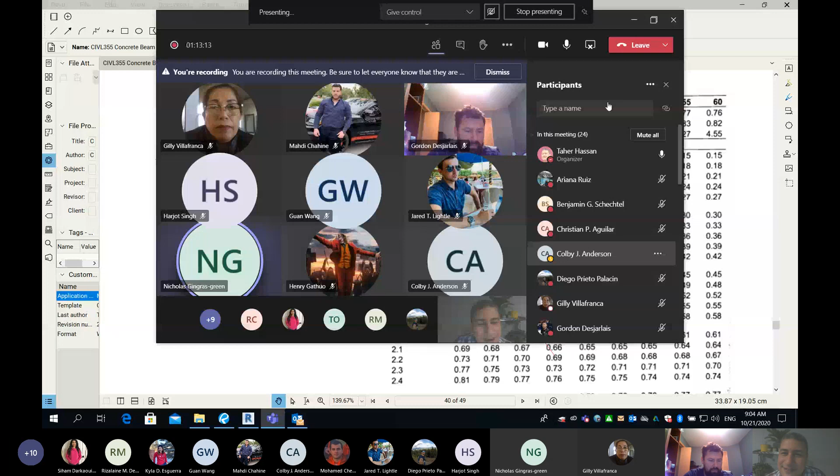So Nicholas said here, why don't you forget about linear interpolation and simply go ahead and use the bigger number, 5.8. You get 2.26 and use this number. We know that we can get a little bit larger area of steel, which is okay. Now, can you do the same thing here? So my reinforcement ratio is 0.58. Should I round this 0.58 to 0.6 and then I get 1.9, and then I multiply the 1.9 times B times D squared, I get MR?

What do you think? A question for you and everyone. If you know the answer, show your hands. Remember, the process here is reversed. We're not doing design, we're doing checking. So I'm asking you here, can we ignore the interpolation and use the larger K and find my MR? What do you think? For marks, not free. Show your hands, please. And then we're gonna take a break.

Okay, we have 2, 3. I will listen to all of you. I'm gonna start with Gilly on the top left here. I would say interpolation should be important because you are checking if your system is safe or unsafe. So it has to be important that your MR must be accurate. Okay, although this is my question, I will consider this as an answer.

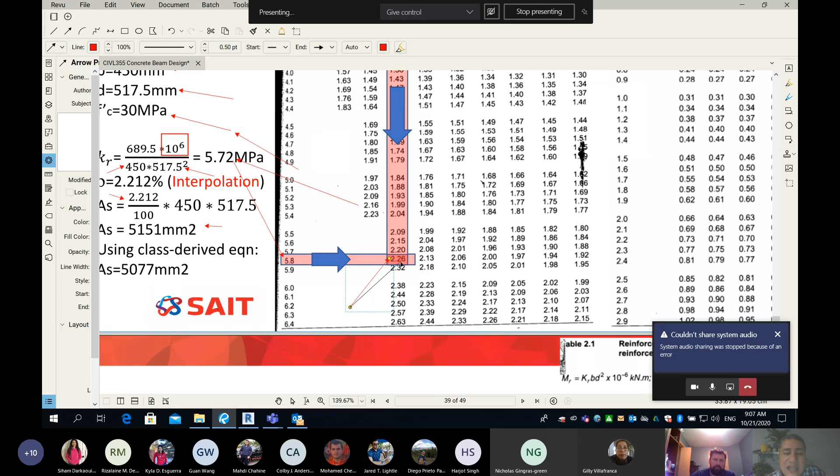But my question is, what if we forget about interpolation? We want to save some time. When I did the design, I went with the larger K. When I do check, should I go with the larger K or the small K? For that design, what Nicholas suggested: forget about interpolation, take the 5.8, not 5.72, head horizontally to the right, and take 2.26. We will get a little bit extra steel, which is fine. How about for the check problem?

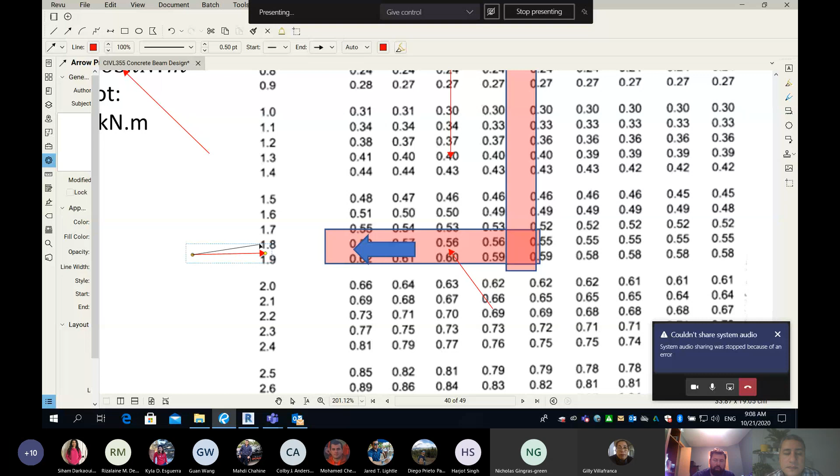Interpolation is the right way to go, no question asked. All the time, interpolation is correct. My question is, if I want to ignore the interpolation, you can see here my 0.58 is in between. If it's 0.56, problem solved, because my K is 1.8, no doubt. But if my rho is 0.58 in between and I don't want to do interpolation, should I use 1.8 or 1.9? 1.9. Okay.

Nicholas, do you want to say something? My answer is same as Gord. How about Gilly? I'm still gonna go with interpolation. No, interpolation is the right way. That's not my question. We forget about interpolation for the sake of time. Should we go with the 1.8 or 1.9? I will go with 1.8, because if you go with 1.9, your MR is gonna be higher than the MR you calculated. Okay. Listen, guys, would you be happy if I gave you 5 marks, Gilly?

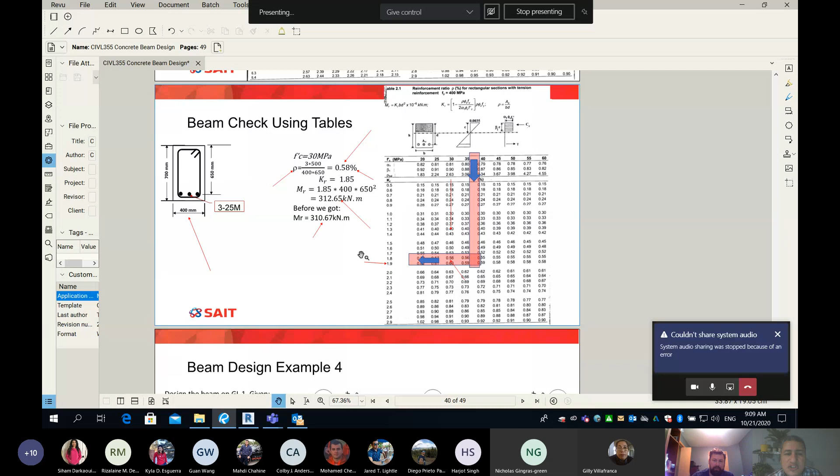Thank you so much. So Gilly said it right. You know, here's the thing, guys. Look at this, please, and the number will tell you. If I just use 1.8 when I get my MR, it means I'm going to get a conservative number for my MR. Conservative number. Okay. If I use 1.9 for my K, what happens is I'm going to get more resistance. That's what my beam will do. Okay. The true number is 1.85.

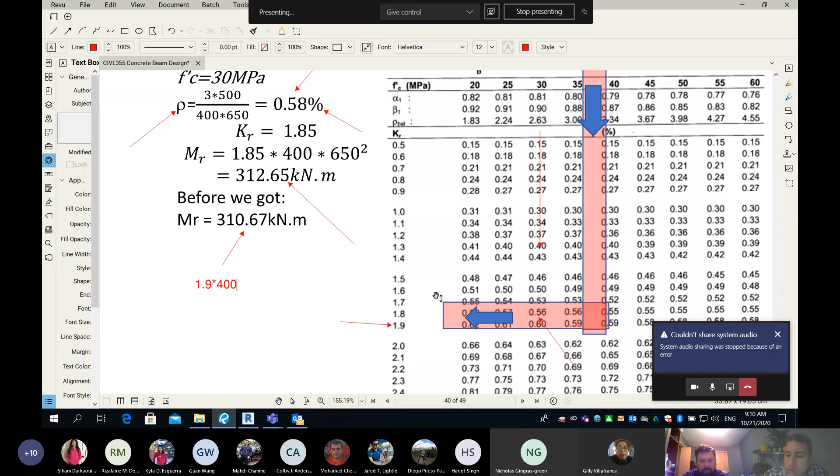Let's do that. So based on 1.85, guess what? I got 312. Can somebody please help me and use 1.9? I'm going to show you. Now, what if I say, you know what? Forget about interpolation, I use 1.9. Okay, so 1.9 times 400 times 650 times 650. This will be the moment based on my guess, or my being lazy and not wanting to do interpolation. So I used 1.9. I follow Gord and I follow Nicholas. So what do I get?

Anybody to help me? 494. 494? I don't think so. That's too far. 321.1. Yeah, 321 is a good number. It's a good number because it has to be close. And look at this, please. So let's agree. What is the real capacity of my beam? 312.65. While me as a designer, I say my beam can resist 321. What do you think? It means I'm so optimistic. My beam cannot do the 321, it can only do 312.

Now let's go with the other option. So go 1.8, multiply by 400, multiply by 650, multiply by 650. How much is that? 304. So here is what you have to do. You will tell your client, my beam can only resist 304. Okay? Which one is better? We know interpolation is the right way, which means we know that my beam can take only 312. So two options. If I go with 1.9, I'm going to tell my client your beam can take 321. And if I go with 1.8, I will say it can take 304.

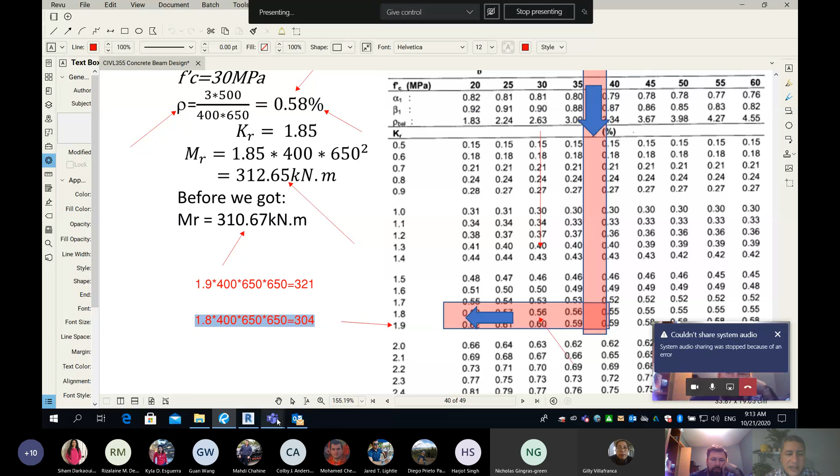No, remember what is the meaning of check? The meaning of check is there is an existing beam, and we would like to see if this beam is going to be safe or unsafe under loads. So it's a safer assumption that your beam is going to take only 304 instead of assuming that your beam will take 320 something, because we know it's going to take only 312, based on linear interpolation, which is the exact method. Are you guys following so far? Yep, that makes sense.